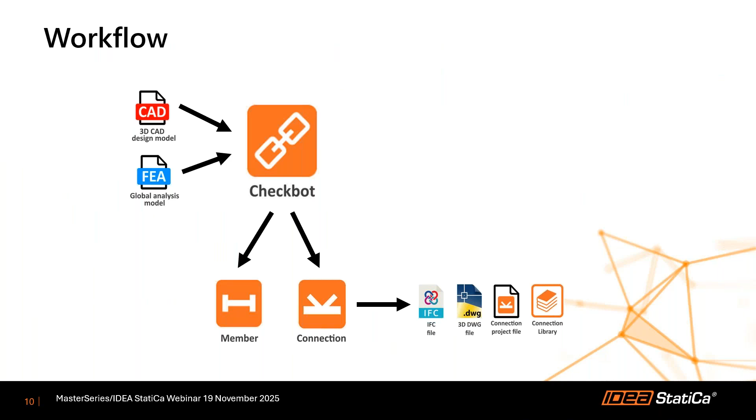To highlight that, we're going to take you through a workflow. That workflow is going to involve taking a global analysis model. We're going to push it through into our collaboration hub, which is called Checkbot. From there, we can send it out to member or connection. In today's webinar, we're going to focus on connection, and we can then generate additional files to supplement the downstream use of that information with regards to detailing or highlighting what the connection looks like to clients, customers, or architects, etc.

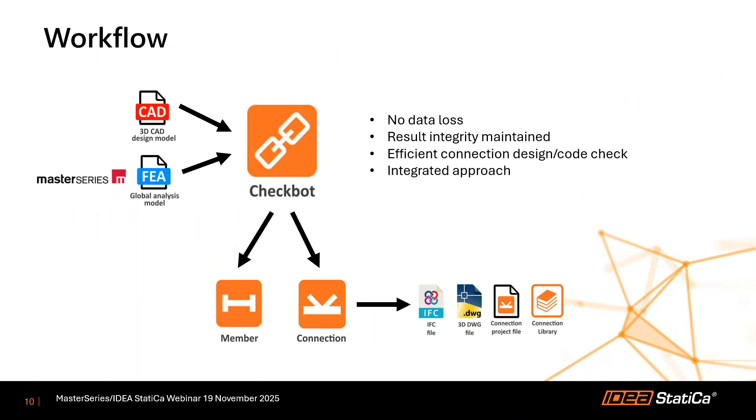That means we've got no data loss. The integrity of the results is maintained. We have an efficient approach to design and code checking, and it's integrated, which means we have multiple people talking to each other at multiple times along the life of the project. This is what we're going to be talking about today: MasterSeries, Checkbot, and connection.

Just as a side note, this link is relatively new, and already it is showing signs of being a very popular link, being used extensively throughout the UK, where it is currently sitting at number 5 in the league charts. And if we were to include Ireland in that, then it's actually sitting at number 6 when we talk about UK and Ireland. So it's only been in existence a short time, but it's already being used extensively throughout the UK and Ireland.

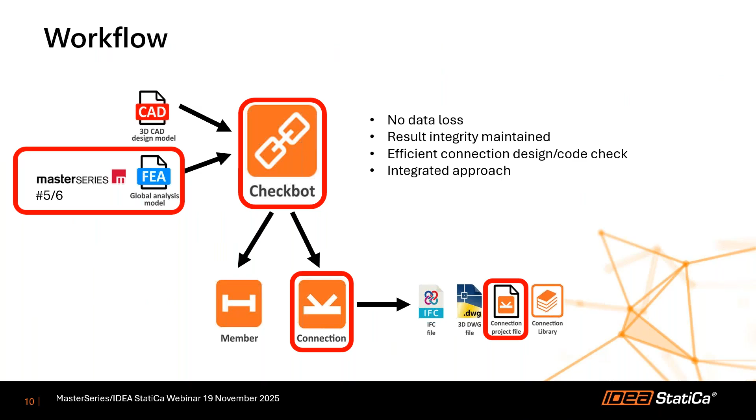And I'm going to ask Andras to talk about the project that we're going to be showcasing today and using in our workflow.

To demonstrate our joint steel design workflow today, we will be using a prestigious real-world project from one of our clients, the new 340 million Belfast Grand Central Station, structurally designed by Doran Consulting. The project features expansive open plan hall spaces with a combination of steel and concrete structures. The station accommodates high pedestrian traffic, bus and rail platforms, and commercial areas, making it a complex and highly visible public building. Its design focused on durability, safety, and long-term serviceability, which makes it an excellent example for today's demonstration. It certainly does—it's a beautiful project.

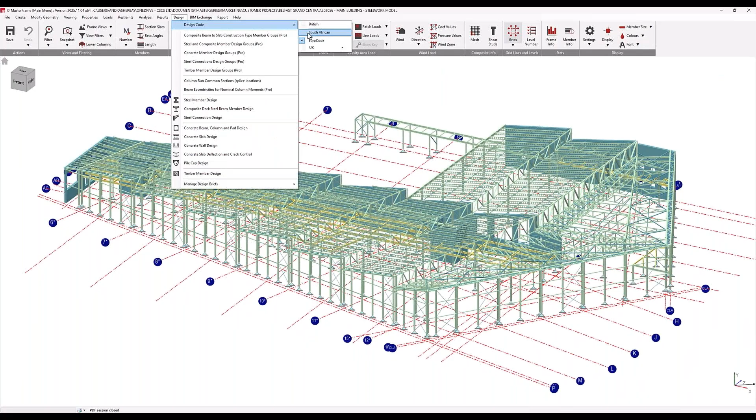Let's begin by looking at the structural model of Belfast Grand Central Station. This is a large building designed by Doran Consulting using MasterSeries building design suite. The designer used Eurocode, though British and South African codes are also available. The layout resembles a big arrow, and the building provides huge open spaces for buses and trains.

Today, we won't build a new model from scratch. Instead, I will walk through the completed model and show how it, together with the analysis results, fits into IDEA StatiCa for connection design and verification.

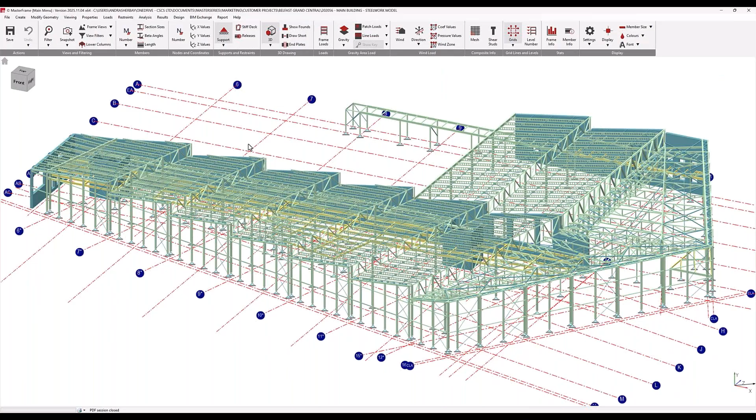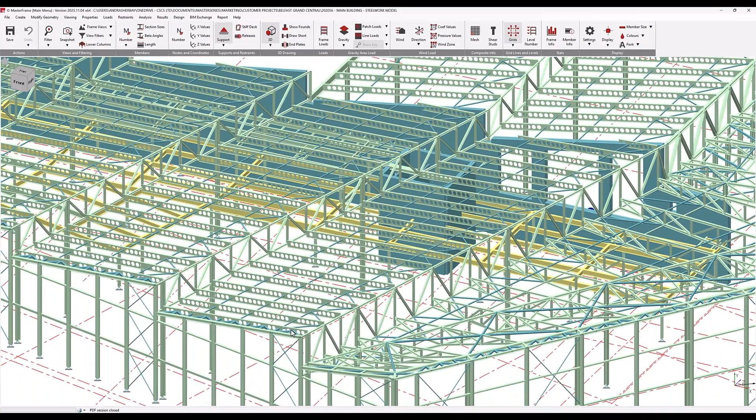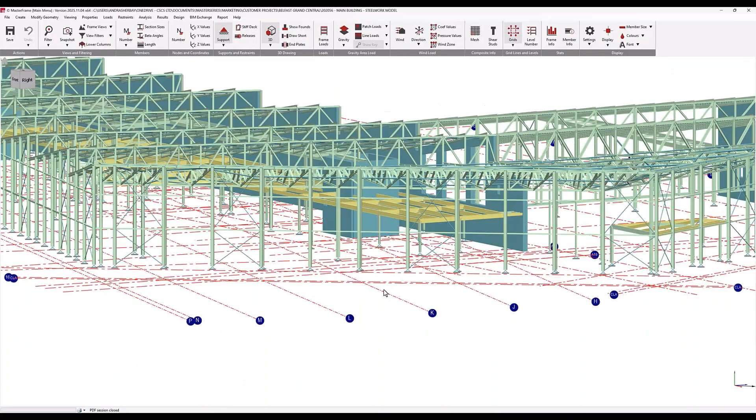The model contains mostly steel members. The roof features huge trusses spanning 10 to 25 meters, with an exceptional truss spanning 60 meters. Between the trusses are cellular steel beams that help distribute loads and provide stiffness to the roof structure. Some trusses are supported by 10-meter high steel columns, while others sit on top of 2 massive concrete walls, which were modeled using finite element surfaces. The building also has small composite levels at some areas.

The outer faces are covered with a glass glazing system. The model includes the main structural elements of this glazing.

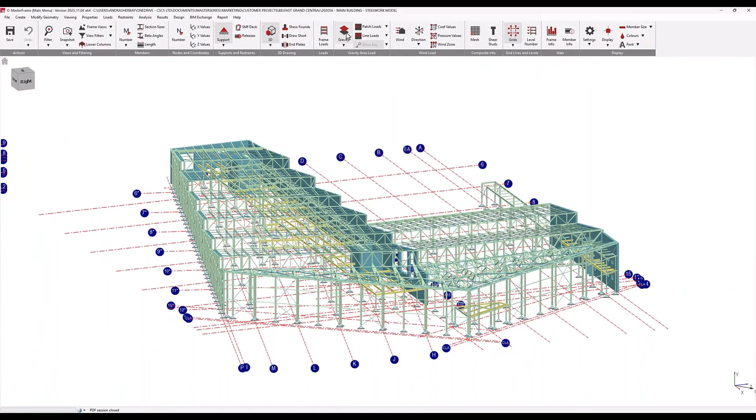The designer supplied gravity loads, dead, live, and other loads as full area loads using one-way spanning area load panels. These panels distribute the load to the supporting members at the edges automatically.

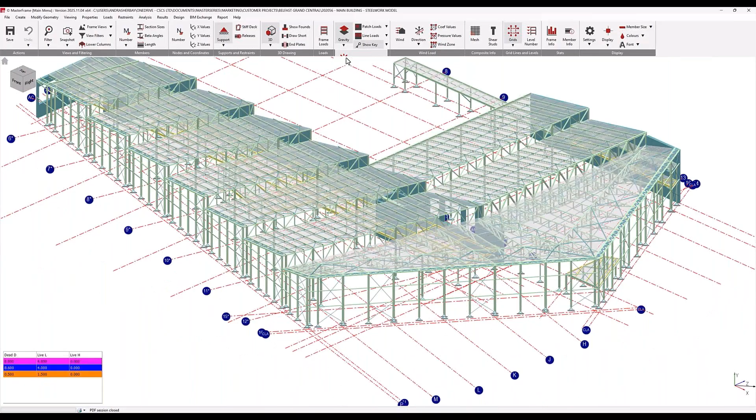And if we turn on the area load visualizations, the panels are colored by intensity, and the accompanying color legend shows the loads on each panel.

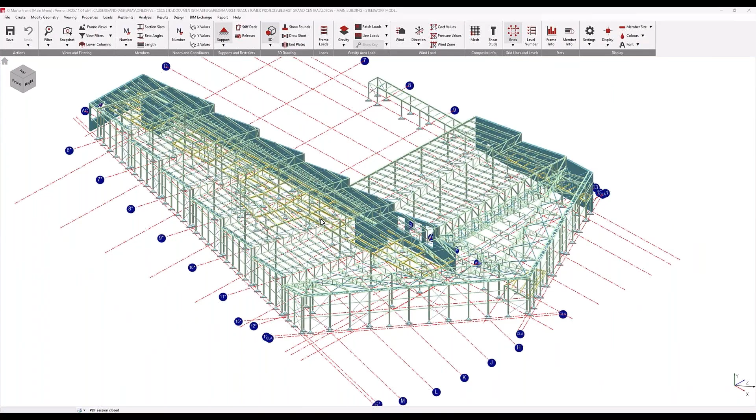For wind loads, the designer used the inbuilt wind analysis module to generate wind pressures in every 45-degree direction, including internal pressure and suction. Turning on the wind visualizations allows us to review the applied wind panels and see the generated wind coefficients and pressure values for each zone in each direction.

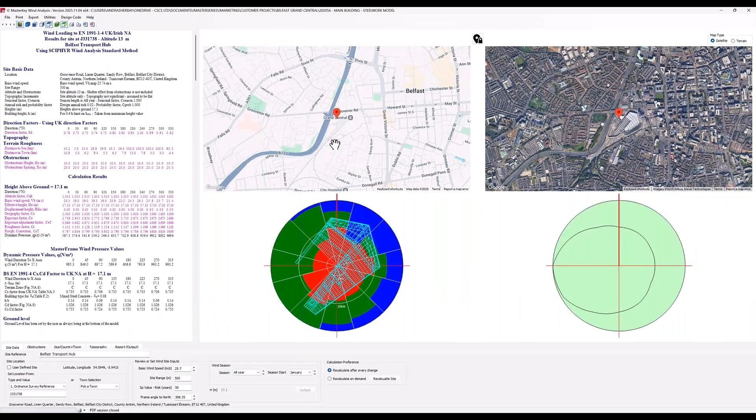The only input required is the site location, which can be selected via Google Maps, though other options such as postcode or coordinates are also available.

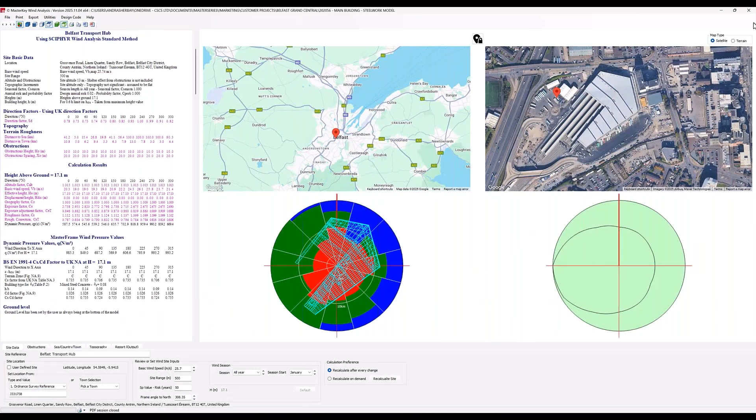An interesting fact is that Google Maps already shows the hub that has been opened. And once the site is selected, the module automatically creates the zoning and calculates the wind pressure on the structure.

If we switch to color by section under the 3D option, we can review the allocated section sizes and material grades.

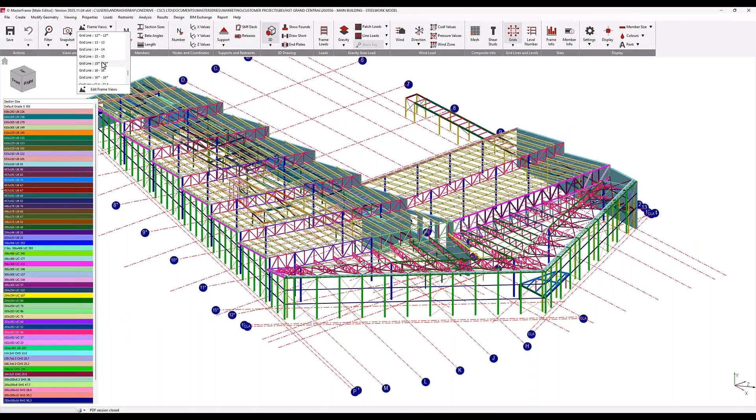Using frame views, we can concentrate on a level or grid line.

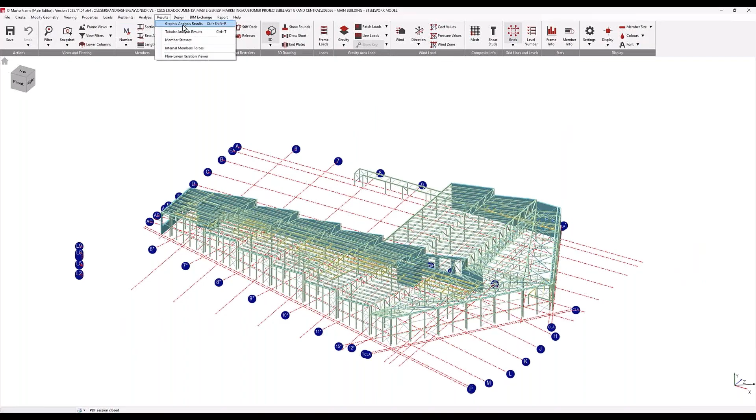First, I will switch to one of the frame views so we can focus on a single frame. From here, we can review the full range of analysis results, including the deflected shape of the structure.

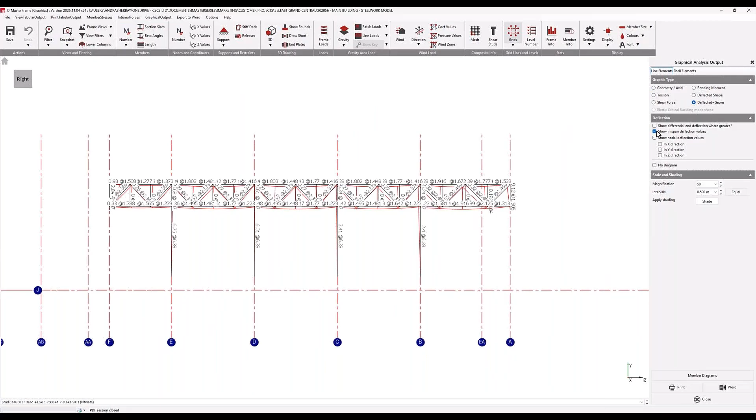We can turn on in-span and nodal deflection values, bending moment diagrams in both the major and minor axes, shear force and axial force diagrams.

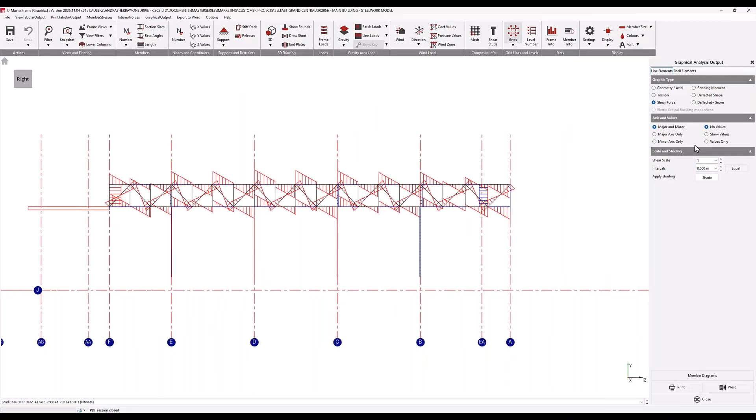If you want to quickly review the maximum and minimum values across all combinations, we can simply switch to one of the envelope results.

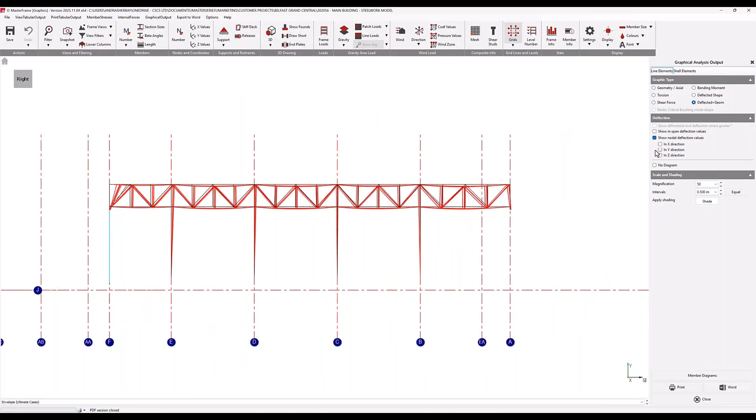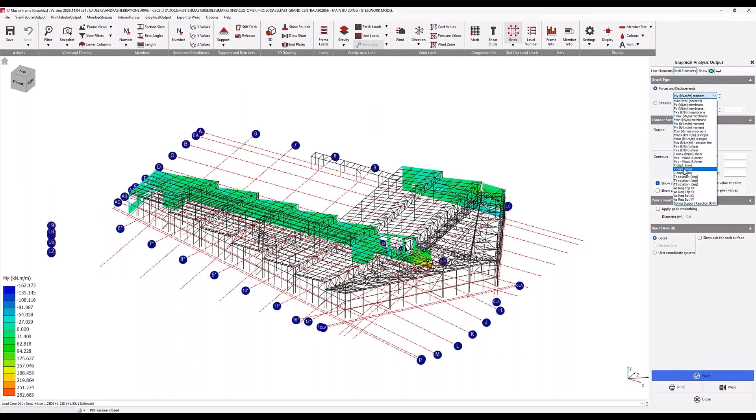And of course, for the shear walls and FE surfaces, we can review all shell element results as well: deflections, membrane forces, bending moment, and the various stress components.

With the frame analyzed, we can move on to the design stage. In MasterSeries, the design tools are modular. This time, I will focus specifically on steel member design.

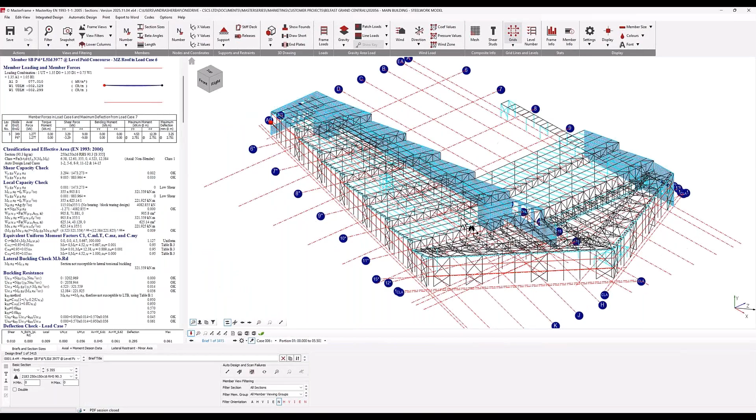We can design members individually, or we can create design groups so that all elements in the group are designed together for the worst case scenario. MasterSeries automatically identifies the governing ULS and SLS load combinations and runs the design checks for those combinations.

On the left-hand side, we can review the detailed calculation, including local capacity, buckling resistance, and serviceability cases. On the design tab below, we can adjust any of the design parameters, such as buckling lengths, design factors, or deflection limit.

If needed, the auto design tool can quickly find the lightest or the shallowest section that still satisfies all requirements.

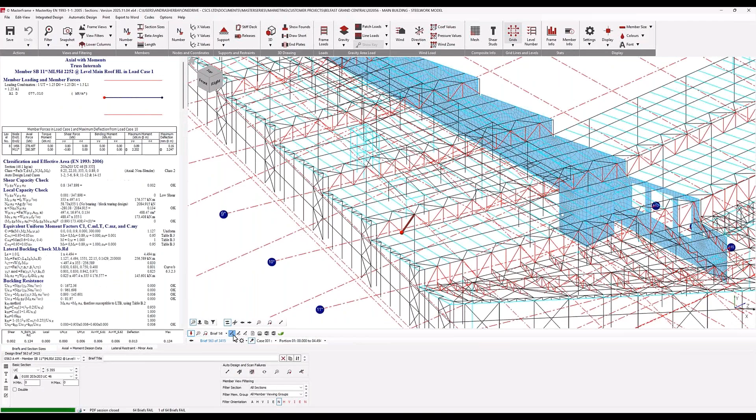Once the design is complete, we can run scan for failures to check whether any members are failing, and we can display utilization ratios on all members, highlight only the critical member in each group, or even isolate just the failing members if we want to focus on issues.

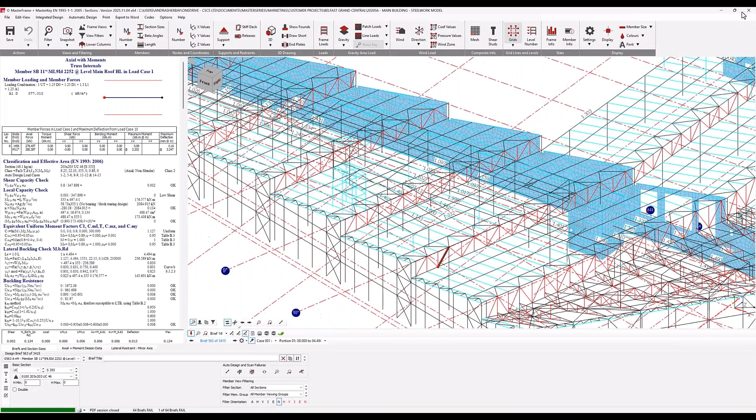Under the BIM Exchange main menu, we can find the IDEA StatiCa export function. Using the link, we can export either the whole or only a selected portion of the model, including all analysis results, directly into the IDEA StatiCa checkbot.

On the link tab, we can select the program directory of IDEA StatiCa and the project which will be created during the export. On the load case tab, we can choose which load cases to export. There is also an auto select critical load cases option.

On the member tab, we can choose whether to export physical members or analytical members. Physical members keep each member as a single piece without internal nodes. Analytical members automatically split members at every connecting member, creating internal nodes.

On the Export tab, we can select the purpose of the export. If we choose connections, only member end forces are exported, which is sufficient for connection design. However, if you want to use IDEA StatiCa's member design tool, we must export intermediate forces along the member as well.

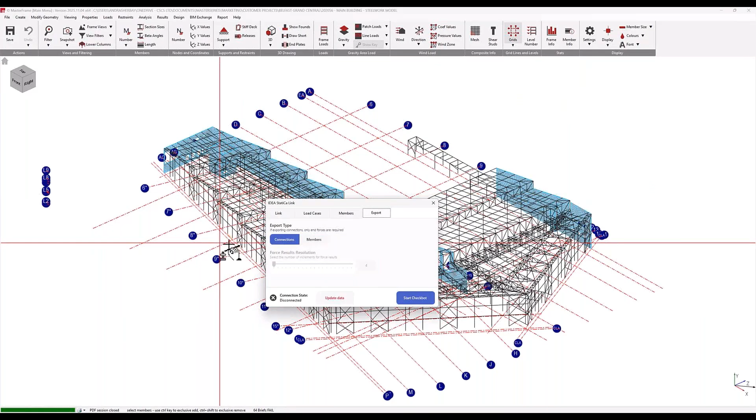Once everything is set, we simply select the members we want to export and click Start Checkbot. And remember, it's not necessary to export the full structure. Exporting only the relevant portion is perfectly fine.

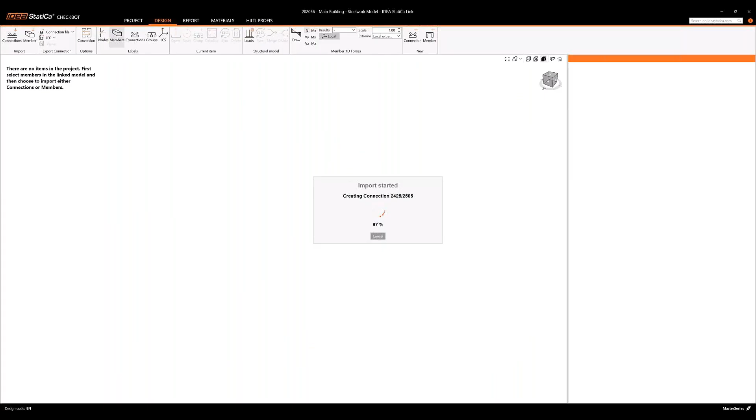With that, I would like to hand the presentation over to Ralph, who will take you through the next stage. Thanks, Andras. Well, the first part then is to import the relevant nodes into Checkbot, which thankfully we actually sped up for you today.

This is a big project, lots of connections, and you'll be thankful to know that we've provided tools in Checkbot to help you organize those connections into connection groups. The first thing that you see highlighted down there on the right hand side of your workspace is just one of the many groups that has been created.

And just like Andras has mentioned with failing members, the use of these design groups allows you to focus on one parent connection, which, let's say for argument's sake, is at the top of the tree, and then all of the children under that parent connection inherit the same details, the same operations, the same connection type as the parent. So this means you only need to focus on one main connection, and then you can let the children inherit the design and be checked.

Probably some of those children will fail, but you'll know which ones fail, which means that you can then just allocate time to check the ones that are failing as opposed to checking all of them. And again, the aim is to maximize the efficiency of your time as an engineer going through all of these connection designs.

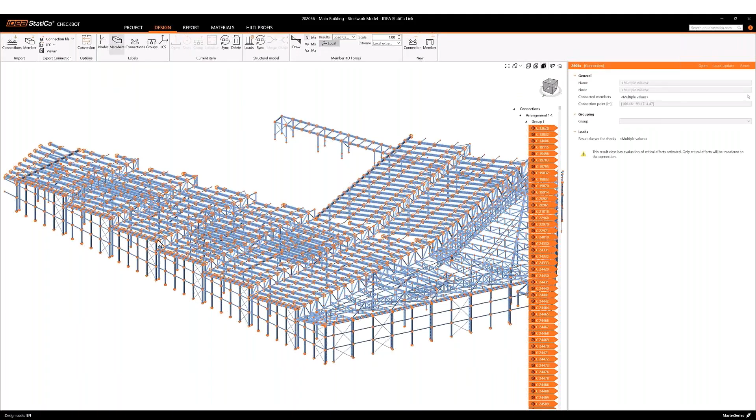So I'm actually going to focus in on one of the stub columns that bears onto the shear wall. And as you can see from this model, it's actually made up of smaller analytical components, but together they make up the one column.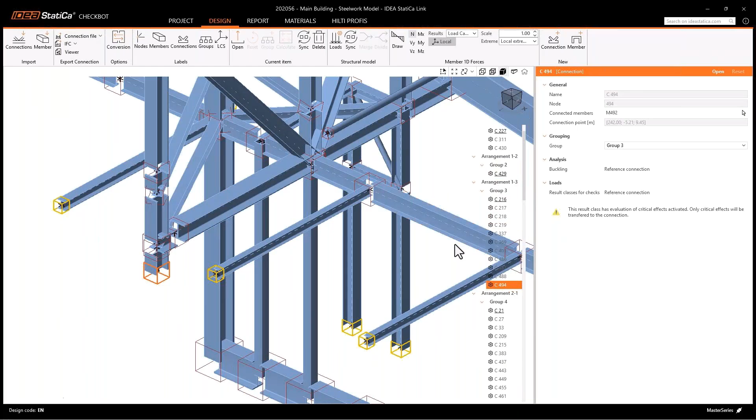So yes, we're focusing on the base plate in this instance, but we can actually merge the components of this member together so that it forms one member with regards to the Checkbot model. This merging facility is quite useful because it allows us to assimilate the members together and eliminate connections where there are no connections themselves.

So we can see from when we highlight this node that it forms part of another group, but this is a specific group that we're looking at, so we can remove it from that group, create another group from it, and call it something meaningful, like stub column, for instance.

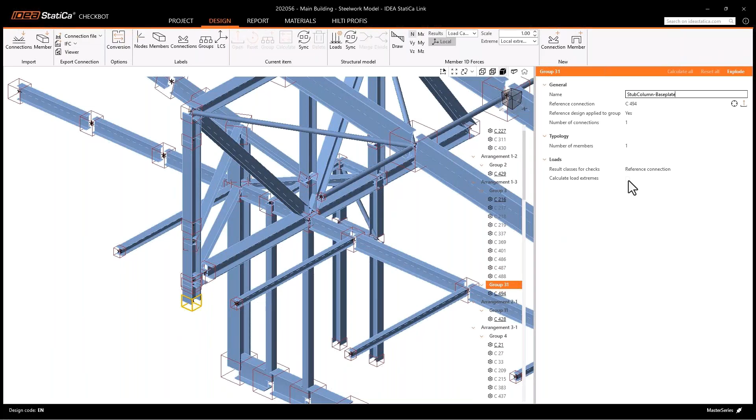Now, throughout this whole exercise, what we are doing is we've taken the geometry from MasterSeries and also all of the relevant load case combinations.

And then what we can do is open up connection directly from Checkbot. This will import the relevant geometry, i.e. the stub column, and it will also import all of the relevant worst case load effects.

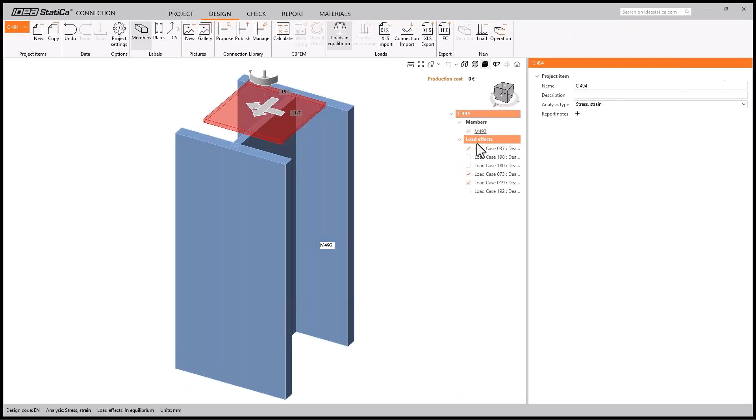So I don't know if you remember, but in the MasterSeries model, there were several dozen combinations. And through clever algorithms, we've actually been able to reduce that down to 3. And that means that we can further reduce our computation time when we check the design itself.

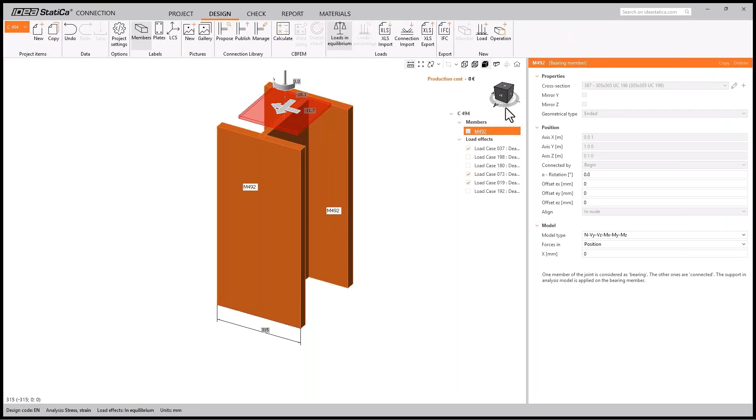So very useful tools on board are the measuring tool. So not only do we know that it's a UC 305 section, but we also know the distance between the flanges and the webs, etc.

So when we come to add a base plate, that's added as a single operation. All of our operations, or some of our operations, take the form of several operations nested together. So a base plate is essentially a plate, a cut, some welds, and some holding down bolts. So we just add those using one single operation, and then we can control the positions of the bolts, the holding down bolts, with regards to X and Y setting out locations.

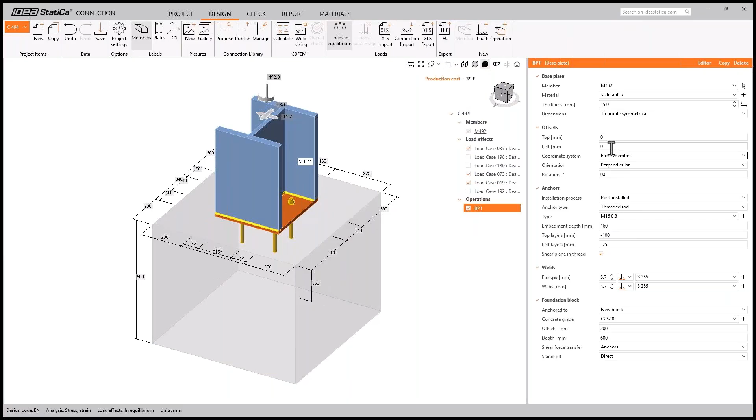And we can also change the overall size of the base plate. Importantly for this exercise, we want to try and mimic the width of the concrete wall that this column is actually bearing on. And we can do that using a series of syntax entries into the offsets of the foundation block.

And once we have the offsets coded in, then the supporting concrete block will change shape and replicate the wall that is under. We can increase the size of the plate, we can change the concrete grade, and we can change the weld leg sizes. The measuring tool also allows us to check the width of section that we want to analyze and the height or depth of section. This means that when we put our offsets in, it will mimic the wall that we want to work with.

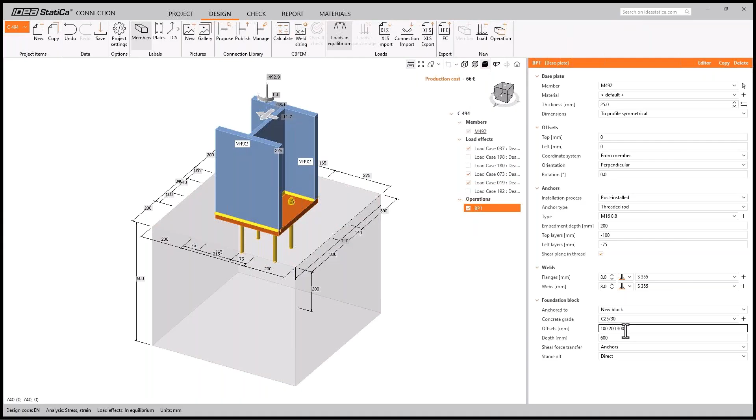So we just need to know the offsets from the edge of the plate to the edge of the concrete that we are considering.

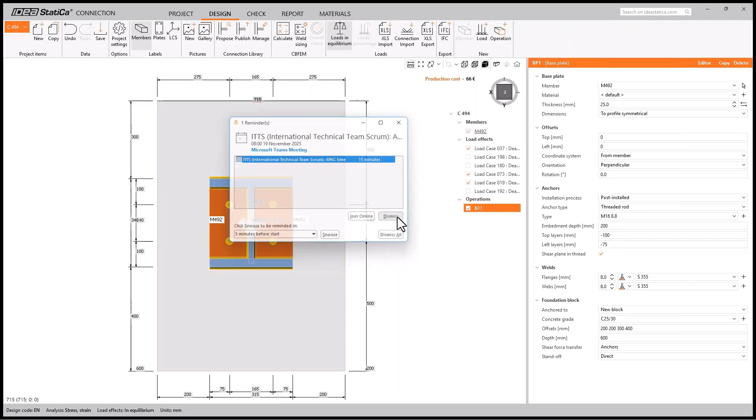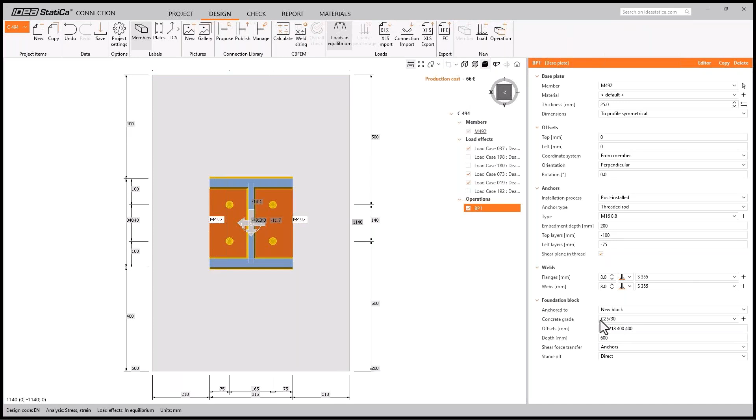I'm just figuring out what those offsets are at the moment so that it makes perfect sense. I'm spending time here because I want to get this right, because we are going to be reusing this information further on down the way.

So this stub column bears on a pocket in a wall, and yeah, I can model the wall either side and treat it as a pocket as well if I wanted to, but I'm just going to treat it as a glorified foundation block essentially.

But I'm going to be doing some extended calculations. So here we've got a post-installed threaded rod, and we've done the initial anchor checks, and we've got passes.

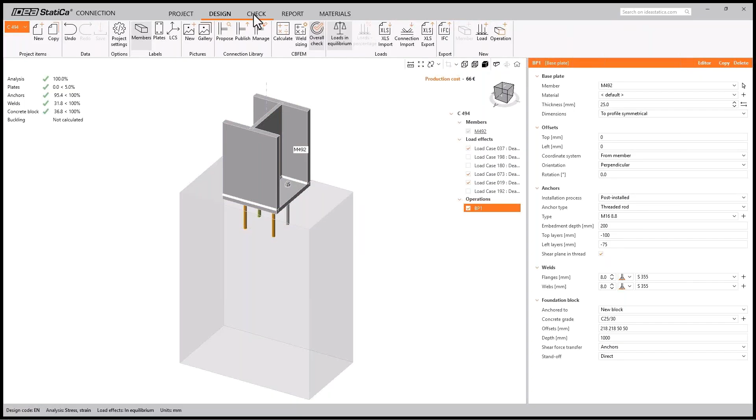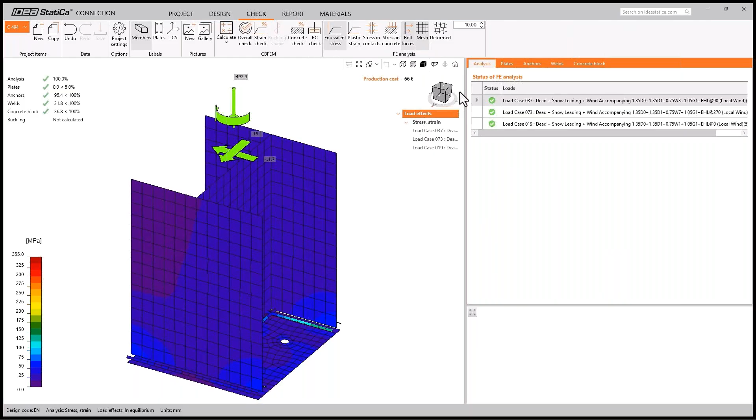When we look at that in more detail, we can see what the stress distribution is, the contact stresses against the concrete, which are really quite low, and the bolt forces. We can also look at the deformed shape if we want to, as well as the detailed checks associated with the anchors, welds, and the plates.

So if we were to look at an anchor check, for instance, using the print preview, you can see that we are utilizing the forces obtained from the analysis in IDEA StatiCa as a check against the allowable design values taken from code. And it's reporting us a pass or fail based on those interaction diagrams.

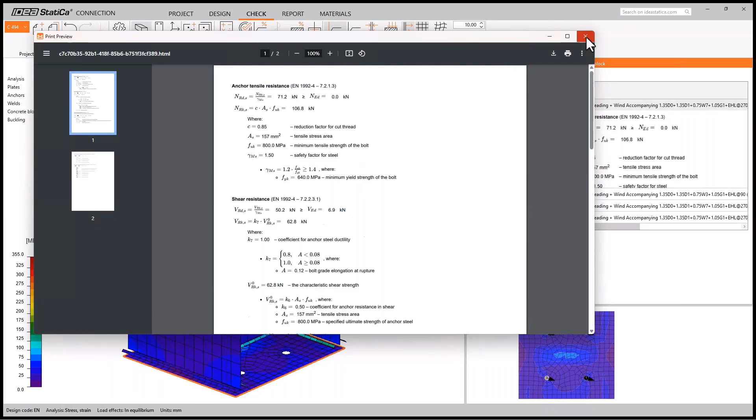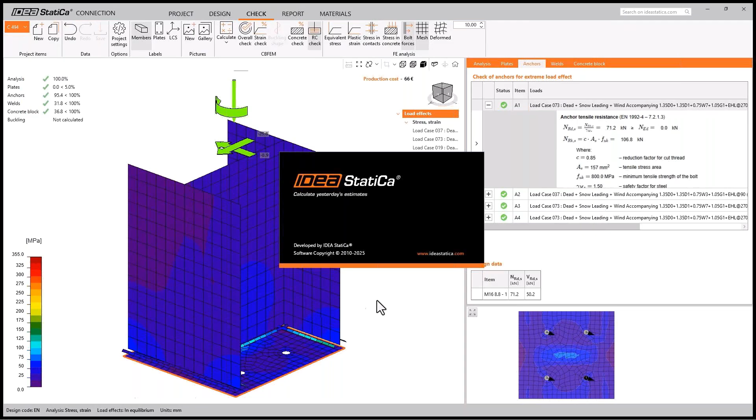So one of the newest features of IDEA StatiCa is the ability to integrate this design with our 3D detail application. It's a relatively new extension to the workflow, but this allows this design to be passed on in its entirety.

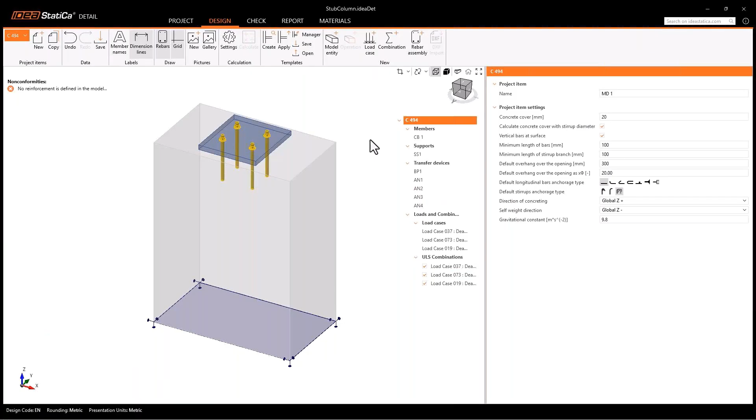Page, which would be detailed concrete checks. The only thing that is missing at the moment is the reinforcement, and also to further restrain the wall with additional supports based on the surrounding wall block around this extract.

So rather than model a lot of wall, we can add essentially continuity to the bottom face and the side faces, and importantly, make them the right type of continuity as well.

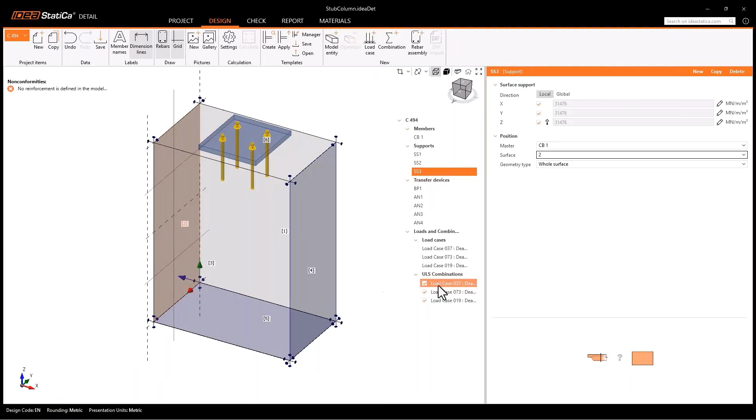So you can see there as well that we've got the three load cases that were in use in connection. You can also see that we've got the same size base plate, and the anchors have come through from exactly the same anchor types and lengths, etc., as they were in connection. So we're not having to duplicate anything here at all.

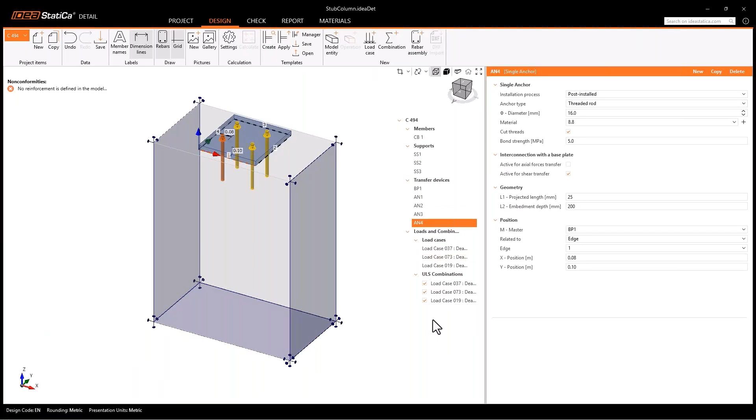The one thing that was missing though with the transfer was the information regarding the rebar. So we have to build that in ourselves now as we go. And we do that by assigning a diameter, and then we tell the application what that reinforcement looks like by one of several methods. So we're going to use edges as our definition once we've defined the surface.

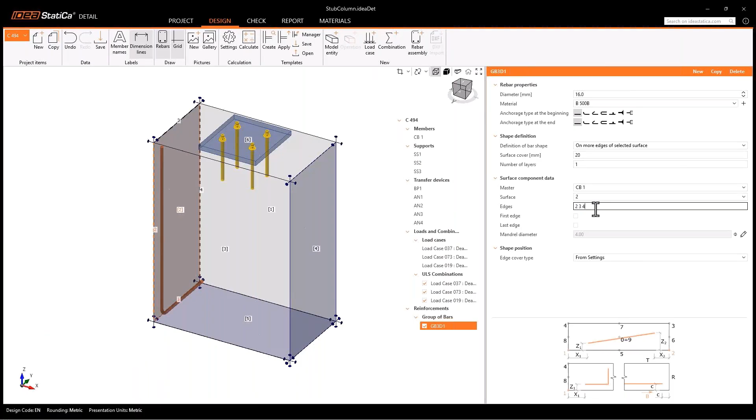So our edges to get a U-bar would need to be 3 in quantity, in this case 2, 3, and 4, and we end up with a U-bar. We do have different definition techniques as well, but using the edges of a surface is by far the easiest way to input the data.

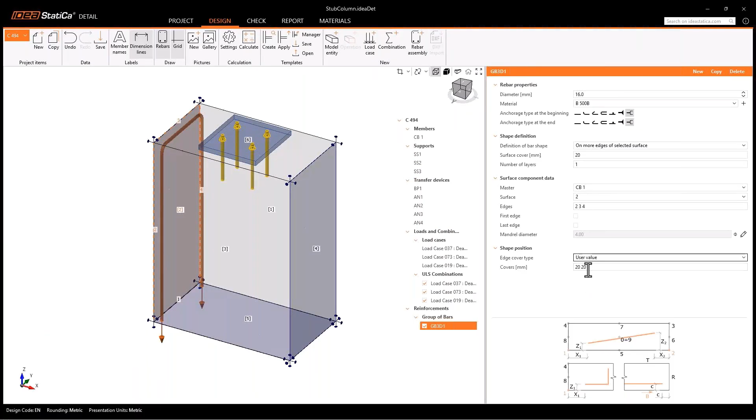And again, we can tell the application that we've got continuity past the support with the anchorage type. So we need to tell the reinforcement where it is within the concrete block, and we do that by amending the cover and the surface cover.

To get a number of rebars or reinforcement along the length of the wall pocket, we just give it a number and spacing. And visually you can see when we look at elevation where these reinforcement pieces sit in relation to the holding down bolts.

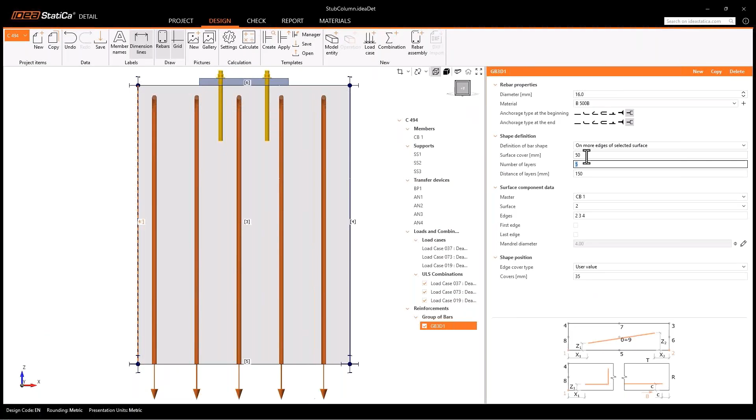The reinforcement where either it's been designed to go, or in instances where we need to do a site validation where the reinforcement has actually been placed on site.

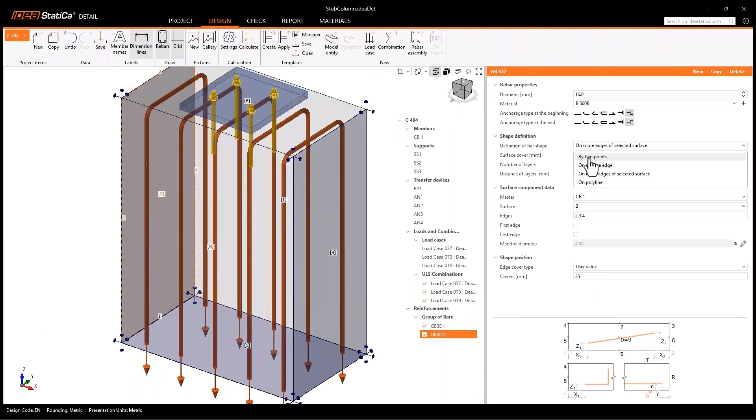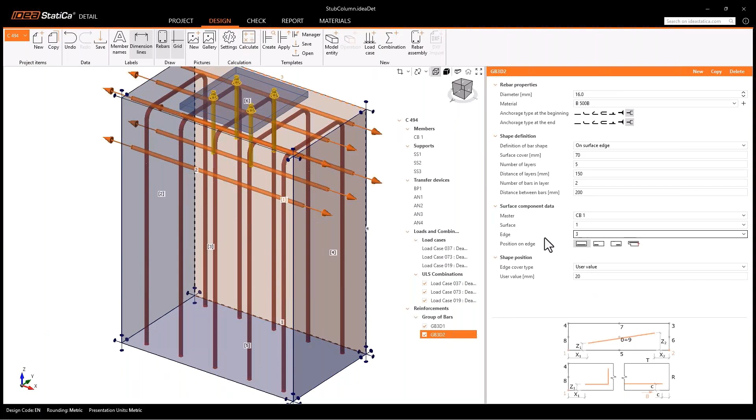Just like many other operations in IDEA StatiCa, we can copy the rebar and amend its surface and edge definitions, which means then to define the distribution steel, we just need to rethink our covers. Basically, that's the cover to the top and the side cover, which should take into account the cover to the U-bars.

And again, it's very visual. So when we look at the U-bar, the distribution bars against the U-bars, we get a very good indication as to how it's sitting, or where it's sitting, within the cage itself.

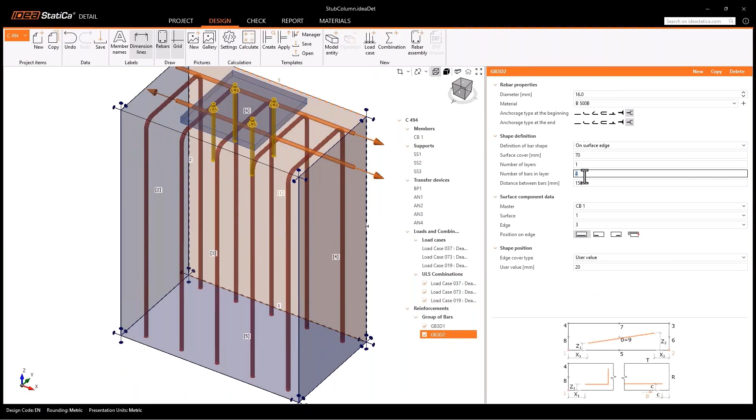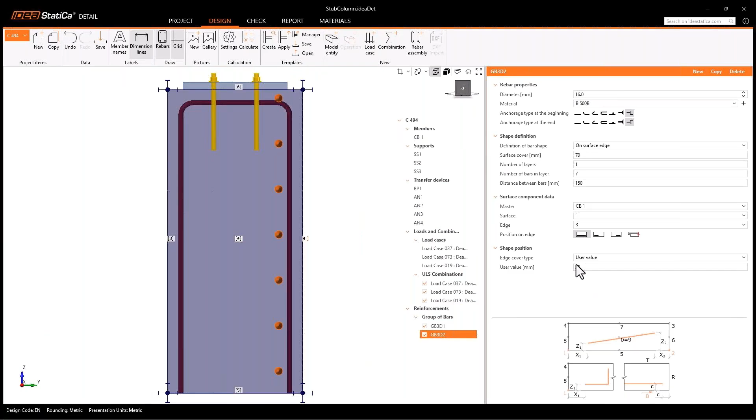So when we flip to the end view, we can see that we need to tidy up our covers. So the shape position gives it essentially, let's say, a start elevation, and the user cover would give it the side cover.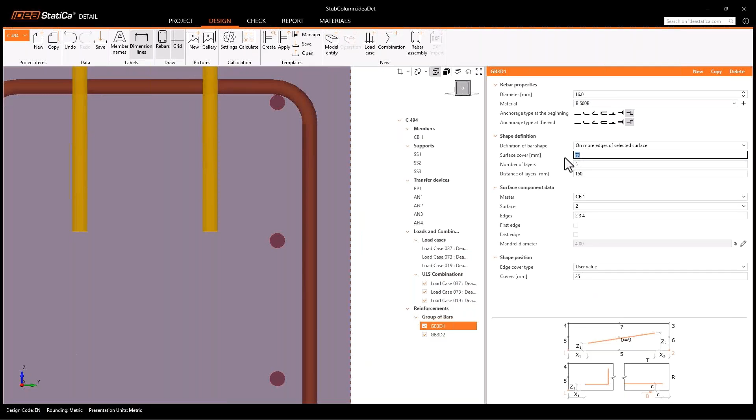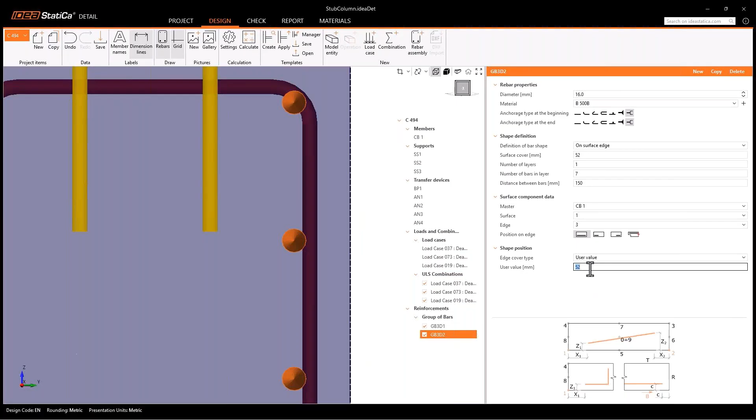So as we flip between the two different reinforcements, we'll get a better idea of where these bars sit within the cage itself, and we can adjust the user value to take into account starting at the bottom of the radius. In reality, it will be fixed slightly differently, but this is where we're going to detail it. In this particular instance, we can just copy this reinforcement definition to the other, and we've got an instant copy in the right place of the same distribution reinforcement.

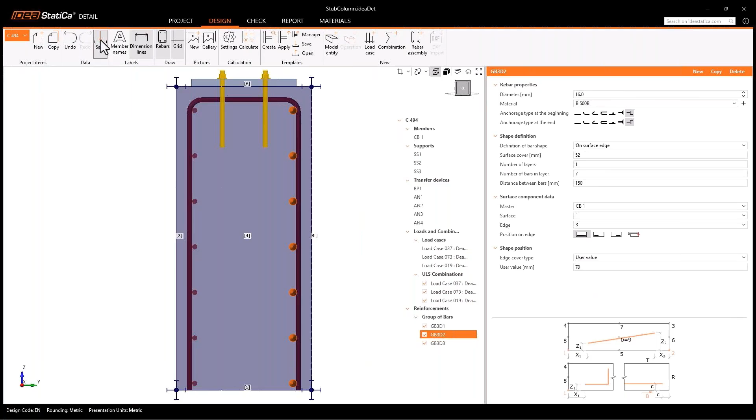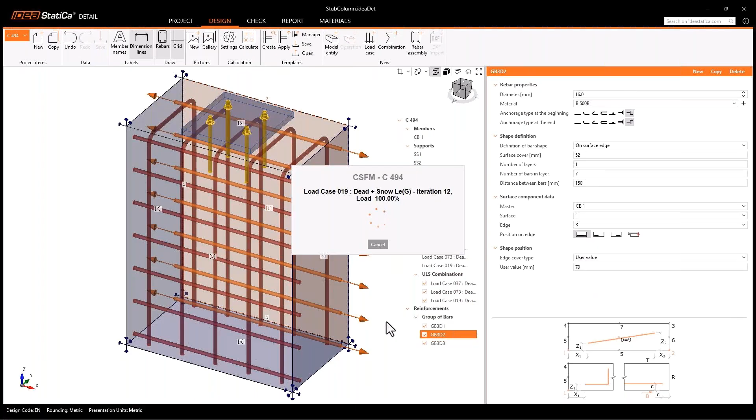So the next stage in our process is to do the calculations to thoroughly check the anchorage and the reinforcement within this zone. This is a relatively quick exercise based on the information within the model itself. Obviously, the more pieces of reinforcement, the bigger the concrete block, the more load cases that you have, all factor into the length of time that the analysis actually takes. For the purpose of this demonstration, I'm also speeding this up so that we can see the results much faster.

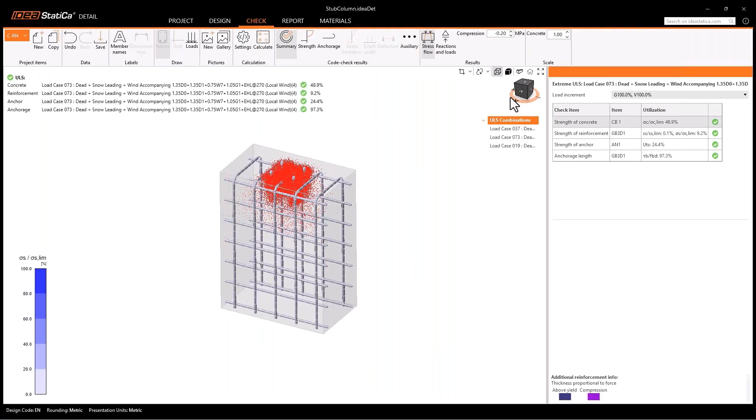So what we're looking at is a brief summary, just like we have in connection, as to the limiting values for the checks for the concrete, the reinforcement, the anchors, and the anchorage. We get to look, or we can look at the stress flow within the concrete block. As you can see there, it's very concentrated around the anchors. But we can also look at the strength with regards to strains and stresses within the concrete block, and even deflections.

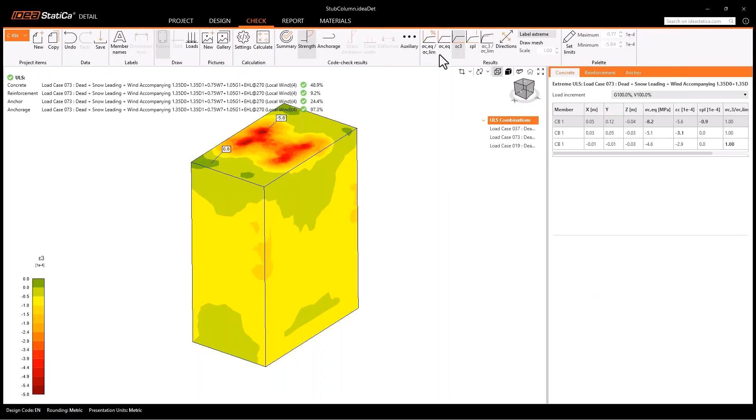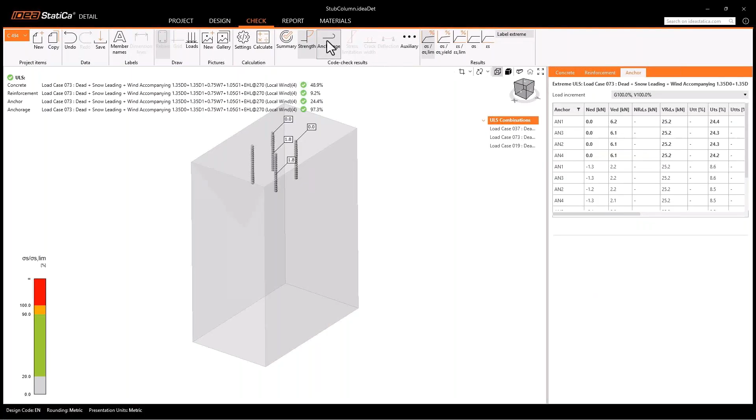We are also able to look at the anchorage results, so that we can see where the most onerous bar position is within the cage. So we do get a full listing of anchorage results per load case, and we also get a visual check as to where the worst one is, which is in the bend of that middle U-bar at 97% utilization.

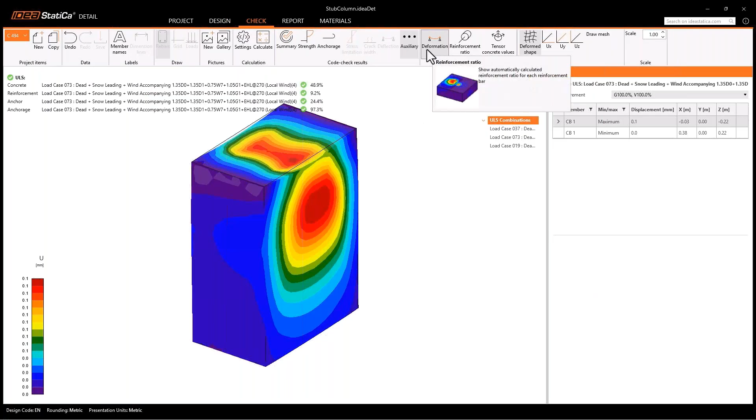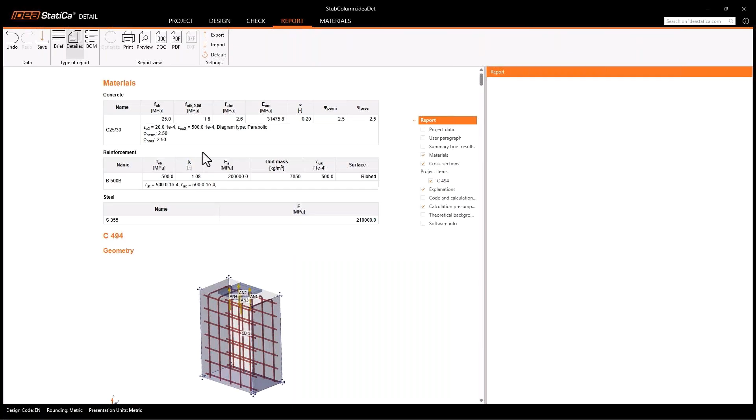Now, it wouldn't be the same if we couldn't generate a report. A report allows us to communicate the design to other people for checking or for further validation. The report can be output straight to printer, or it can be output to document, PDF, or in some cases DXF as well. Contained within the report are all of the necessary inputs and outputs to validate the concrete and its reinforcement placement.

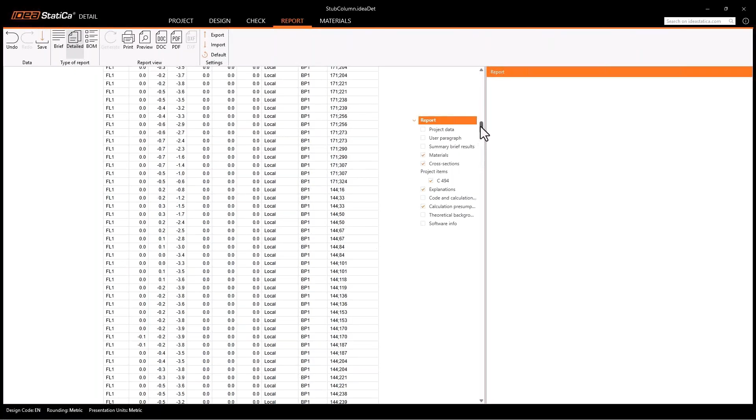And for those of you that are already thinking, I can do 3D concrete for other situations, not just stub columns, you would be right. In the model itself, there are instances where we have horizontal beams joining onto the shear wall, and there is nothing stopping us now doing a cast-in plate design for those steel beam ends bearing into the concrete core walls. That validation, or that release, will be with us very, very soon, which is why I'm not actually showing it today, unfortunately.